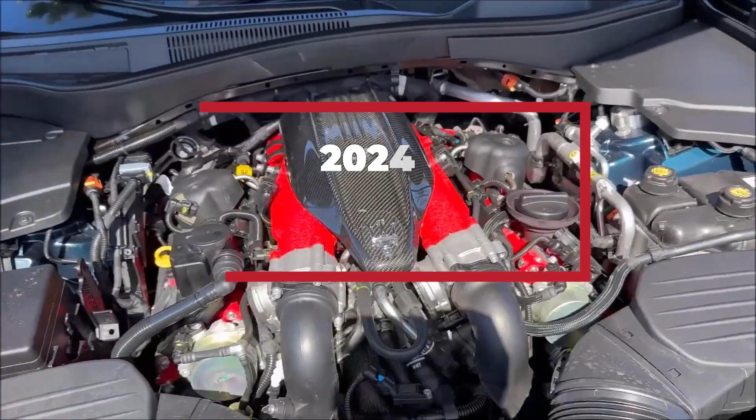Curious about where to find the fuse box in your 2024 Maserati Levante and what each fuse controls? This user guide provides the diagram and exact location to help you quickly identify and troubleshoot electrical issues.

Integrated power module. An integrated power module is a compact, all-in-one solution that combines critical motor control components, such as a motor controller, gate driver, and power stage, into a single package. This high level of integration reduces the need for external components, minimizes PCB space, and simplifies system design.

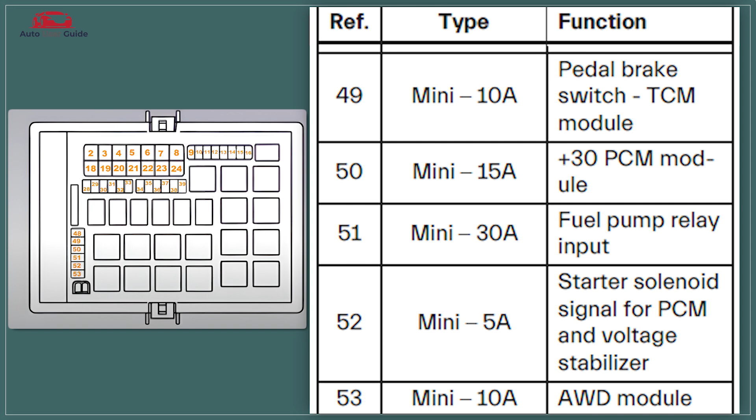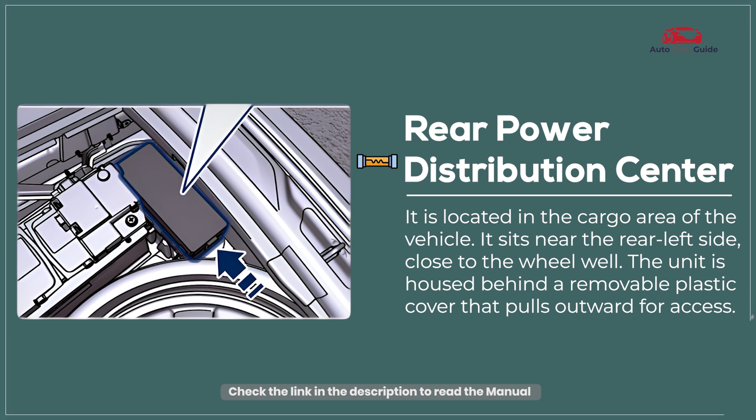Rear power distribution center. The rear power distribution center in vehicles is a compact module that manages electrical power distribution to various systems. It integrates fuses, relays, and smart diagnostics to enhance safety and reliability.

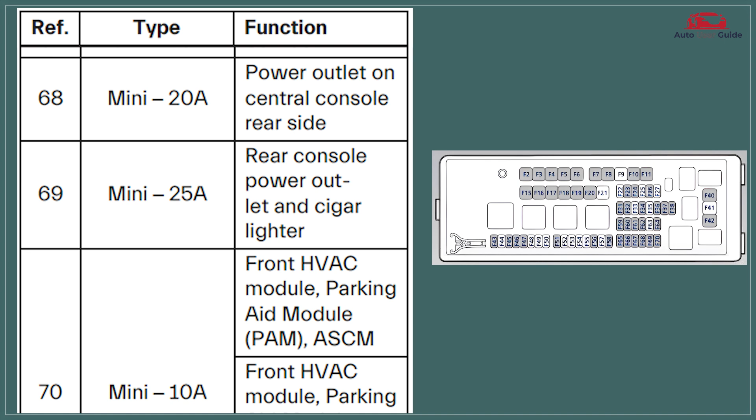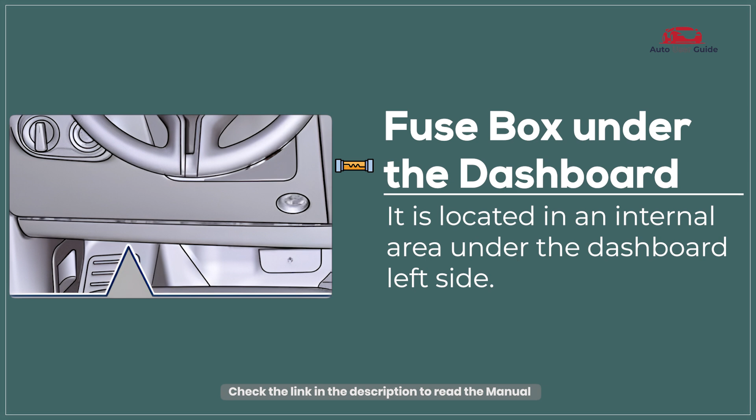Fuse box under the dashboard. The fuse box under the dashboard, commonly known as the interior fuse box, safeguards various electrical components within the vehicle's cabin, including the instrument cluster, radio, power windows, and air conditioning system.

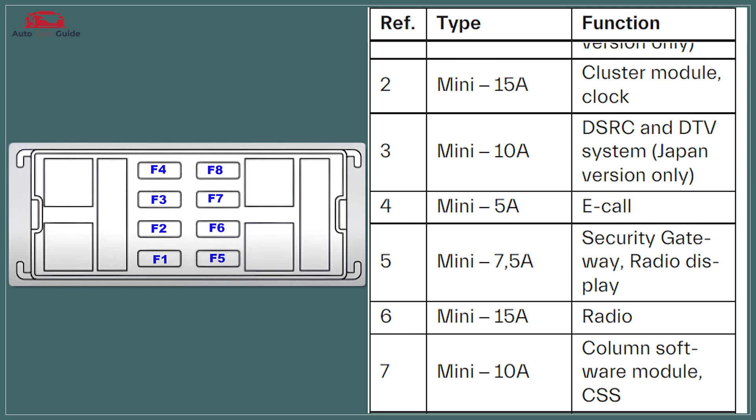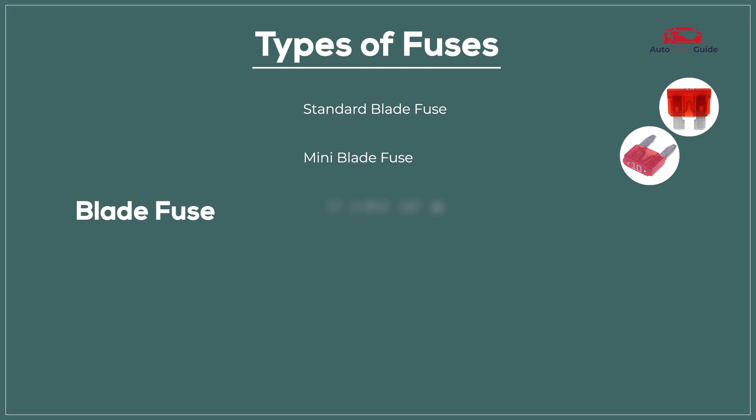Types of fuses: blade fuse, standard blade fuse, mini blade fuse, maxi blade fuse, micro 2 fuse, micro 3 fuse, J-case fuse.

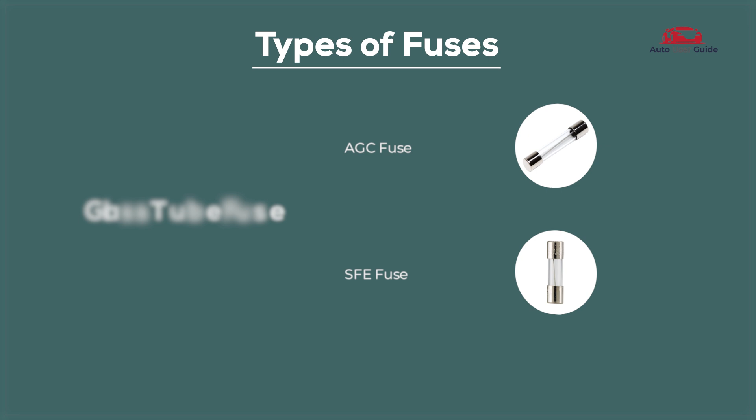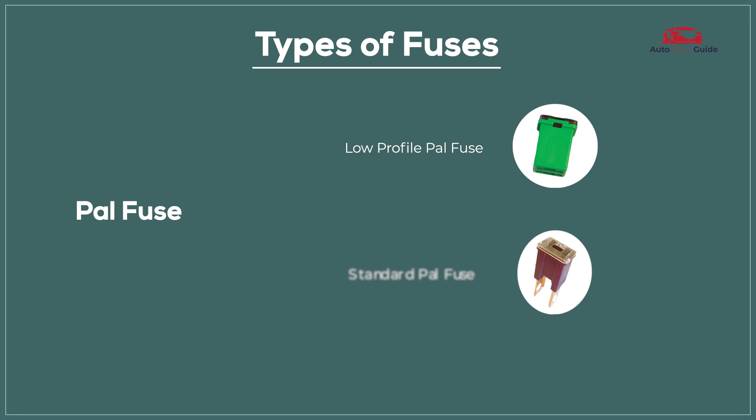Glass tube fuse, AGC fuse, SFE fuse. Ceramic fuse, Bosch fuse, DIN fuse. PAL fuse, low profile PAL fuse, standard PAL fuse. Link fuse, mega fuse, high amperage link fuse.

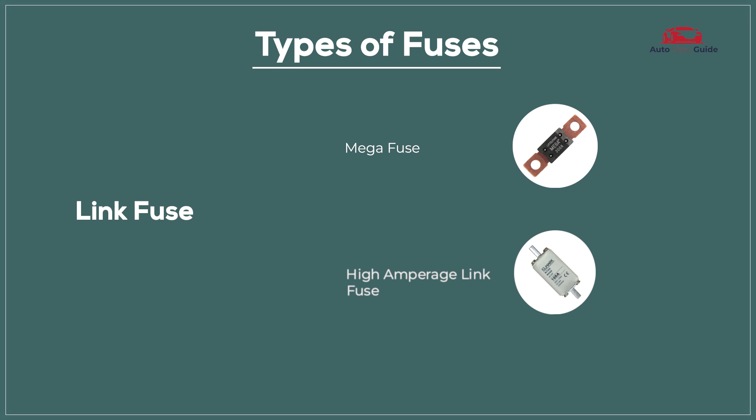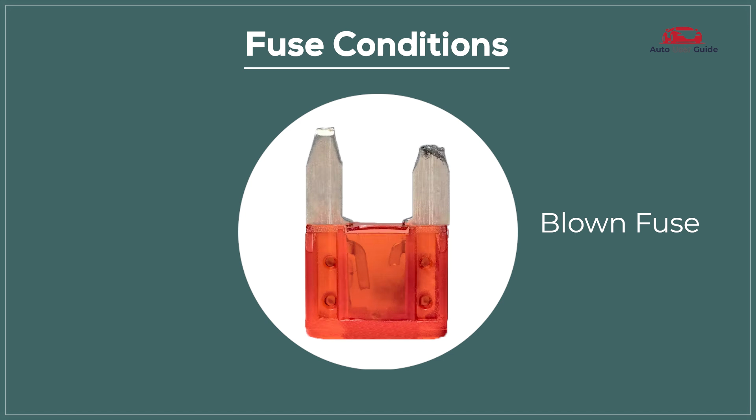Fuse conditions: blown fuse. A blown fuse means it's no longer functioning and needs replacement, while a perfect fuse is in good working condition and performing as expected.

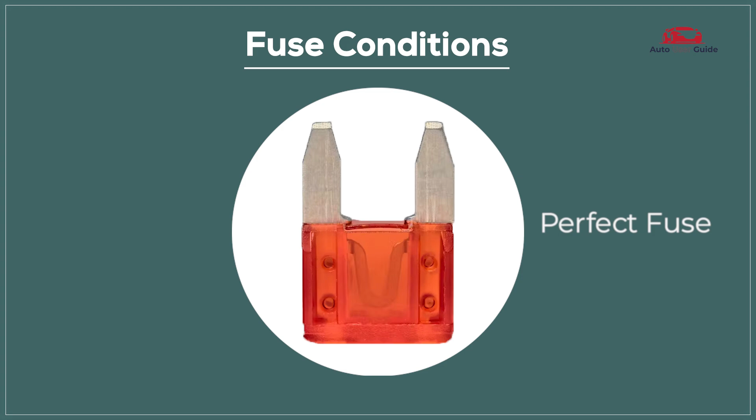How to change fuses: turn off the vehicle, locate the fuse box, identify the faulty fuse, remove the faulty fuse, inspect and obtain a replacement, install the new fuse, test the replacement.